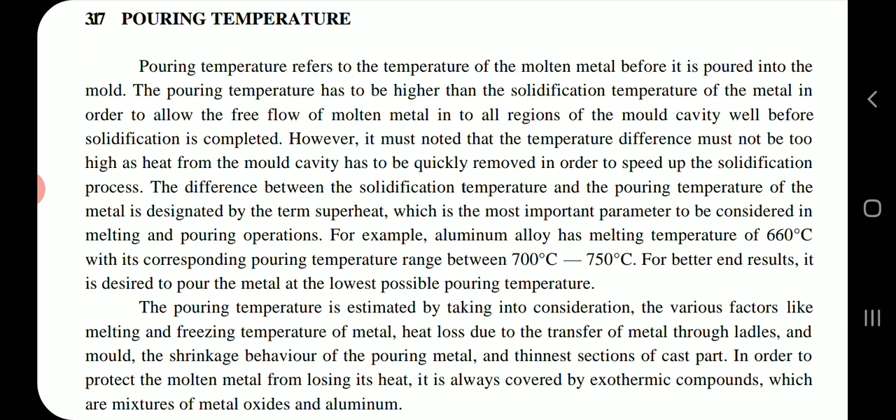Stir casting. Foundry practice has led to various technological advances with respect to materials and processes from which metals can be efficiently and economically cast. Stir casting is one of the advanced liquid cast metal technologies in producing aluminum based metal matrix composites by employing the stirring principle of liquid metal. The concept and benefits of stirring or agitation of molten metal go back to the foundry age, where stirring of liquid metal was accomplished by lance gas injection into the liquid metal.

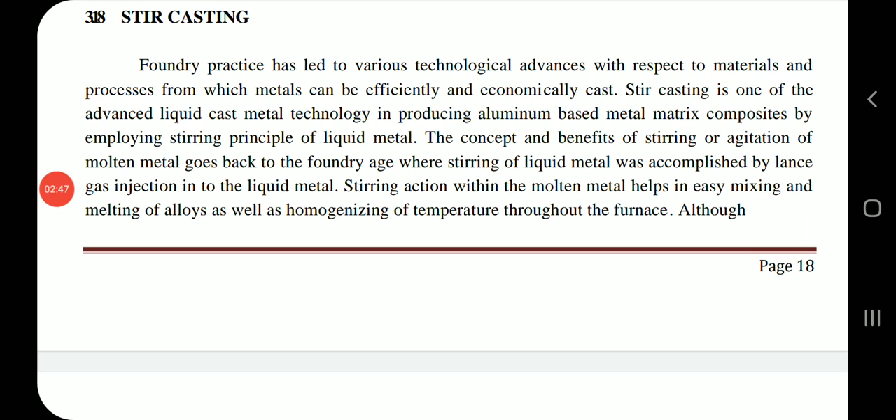Stirring action within the molten metal helps in easy mixing and melting of alloys as well as homogenizing of temperature throughout the furnace. Although successful to quite an extent, the process suffered from limited effectiveness as well as increased dross formation. However, the concept gave way to new technologies, and today, advanced subsurface stirring technologies like pneumatic jet stirring, electromagnetic approaches, and rotary devices have been employed for stirring purposes.

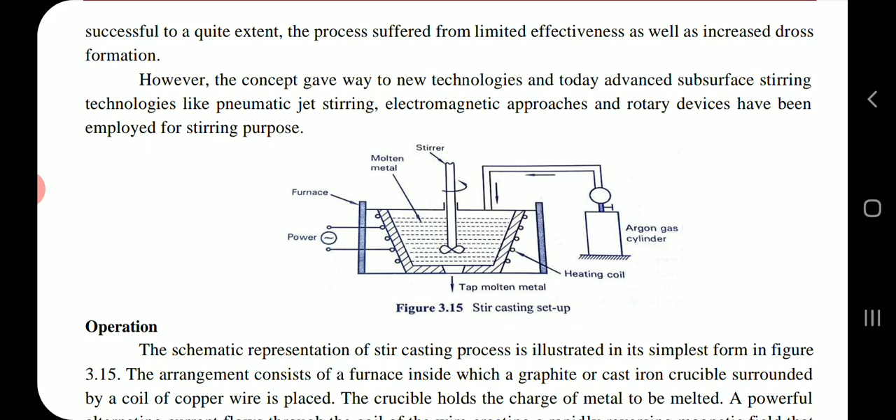Operation. The schematic representation of the stir casting process is illustrated in its simplest form. The arrangement consists of a furnace inside which a graphite or cast iron crucible surrounded by a coil of copper wire is placed. The crucible holds the charge of metal to be melted. A powerful alternating current flows through the coil of the wire, creating a rapidly reversing magnetic field that penetrates the metal. The magnetic field induces eddy currents and circular electric currents inside the metal by electromagnetic induction, thereby producing stirring action within the molten metal.

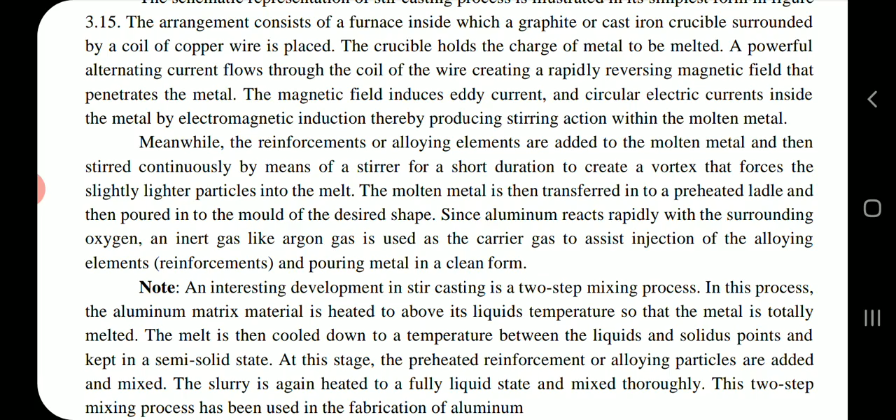Advantages of stir casting: stirring action within the molten metal helps in easy mixing and melting of alloys as well as homogenizing of temperature throughout the furnace, leading to sound castings. Stirring action helps in removal of hydrogen gas, eliminates porosity, gives better dimensional control and tolerances in casting, and clean and sound castings can be obtained.

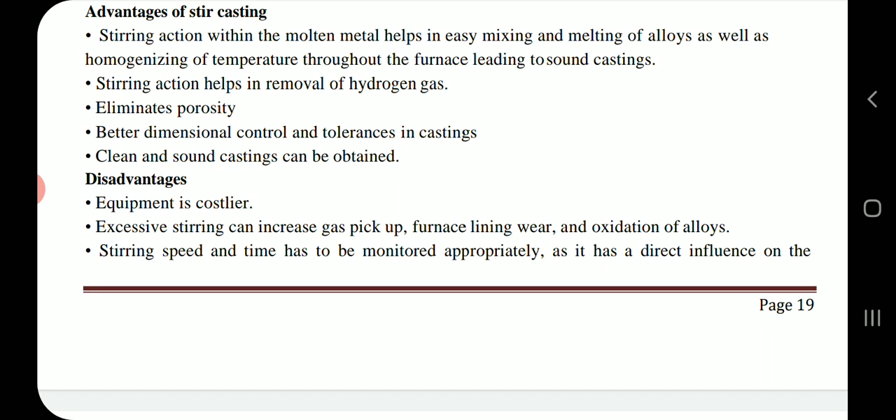Disadvantages: equipment is costlier, and excessive stirring can increase gas pickup, furnace lining wear, and oxidation of alloys. Stirring speed and time have to be monitored appropriately, as they have a direct influence on the hardness of the cast metal. Maintaining an inert gas atmosphere is an additional requirement.